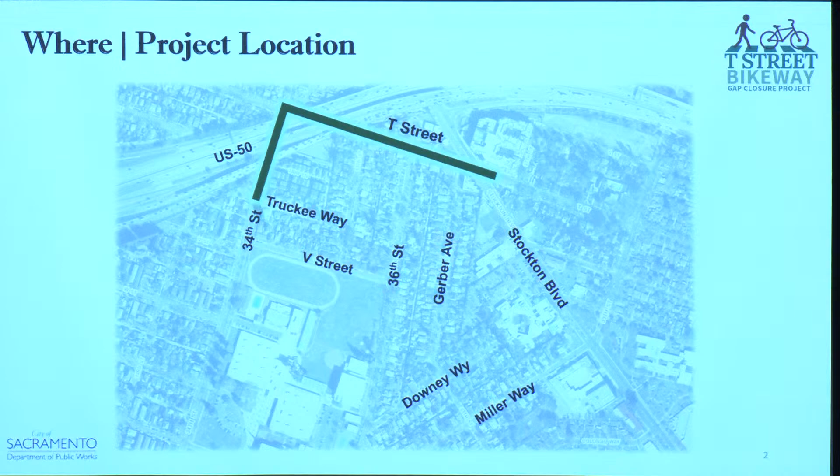If I'm talking too fast, please raise a hand. So where is this project located? This project is just north of Sac Charter High School. The limits are 34th Street from Truckee Way to T, and T Street from 34th to Stockton Boulevard.

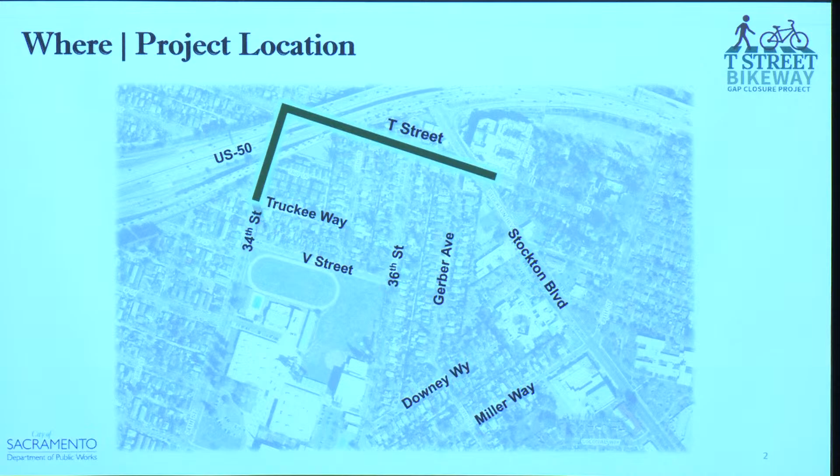Some background on this project: the city's active transportation plan, Streets for People, used public input to identify safety priorities for bikes and peds, identifying the need for continuous bike lanes on 34th and T, a ped crossing at 35th, and signal improvements at the intersection of T Street and Stockton Boulevard.

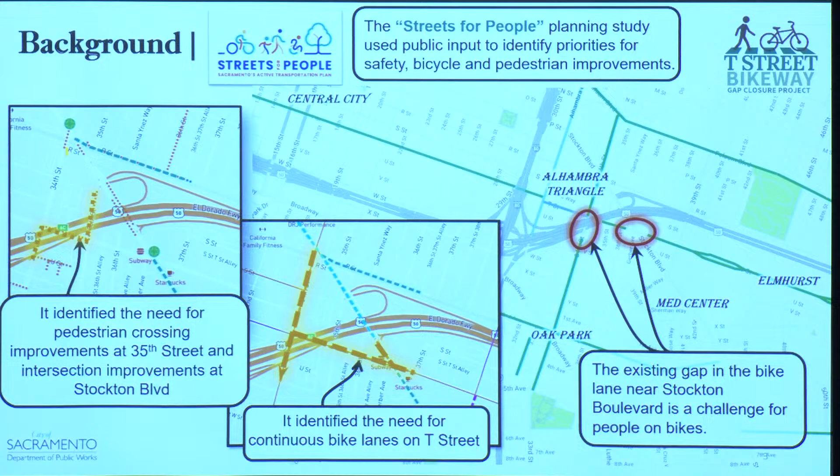Similarly, the Stockton Boulevard Corridor Plan identifies safety improvements for bikes and peds, for the benefit of the existing community and businesses along Stockton Boulevard. The intersection of T and Stockton was further recognized as an area of interest.

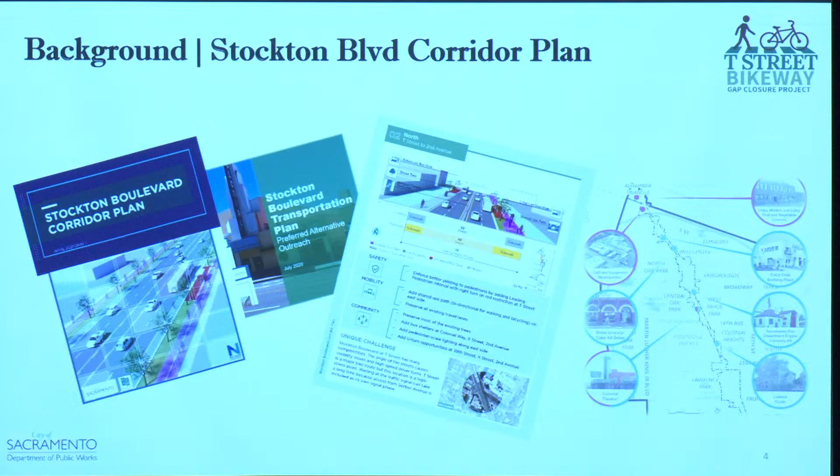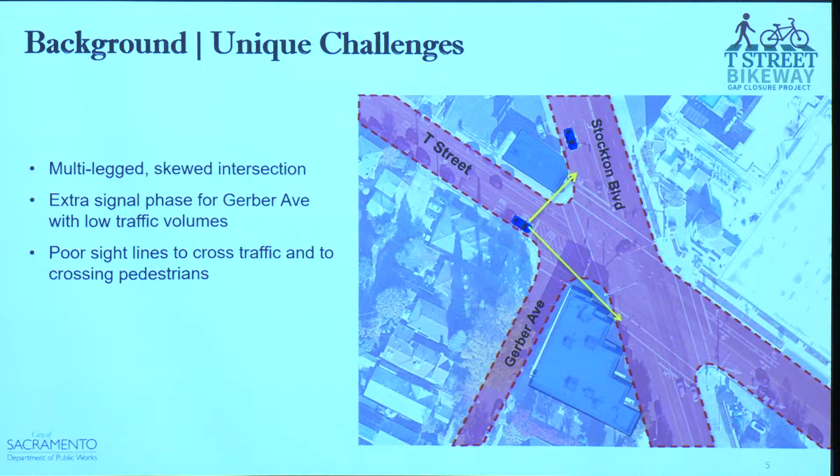Some challenges of the intersection of T and Stockton include a skewed intersection with an extra signal phase for northbound cars exiting Gerber Avenue, and poor sight visibility of cross-traffic pedestrians and bicyclists.

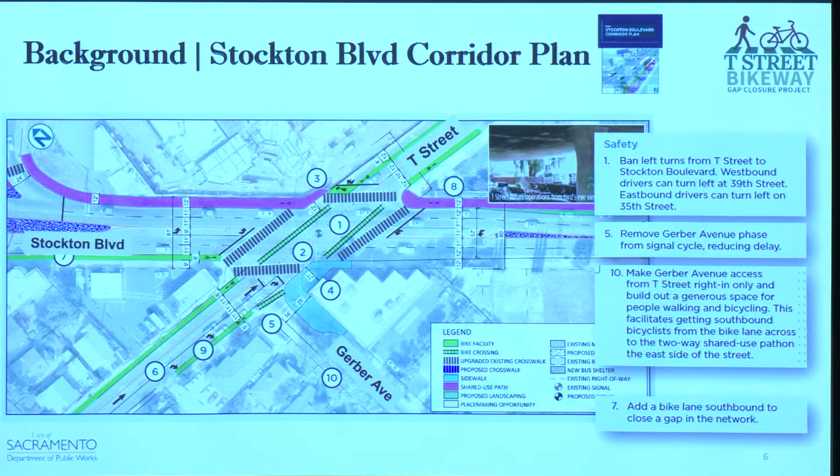At this intersection, proposed improvements from the Stockton Boulevard Corridor Plan were to ban left turns from T Street onto Stockton, encouraging westbound drivers to use 39th Street and eastbound drivers to use 35th Street. It also proposed to remove the signal phase at Gerber Ave, allowing right turns only from T onto Gerber, and add a bike lane on the southbound Stockton approach to T Street.

So why the T Street Gap Closure Project? Well, T Street has a gap in bike facilities. It's a key link between central Sacramento neighborhoods, medical services, and employment centers. It's got a lot of ped, bike, and vehicular traffic with a large rate of people commuting by foot or bike. Because of this and the complex nature of the Stockton, T Street, and Gerber intersection, T Street is a priority for safety improvements.

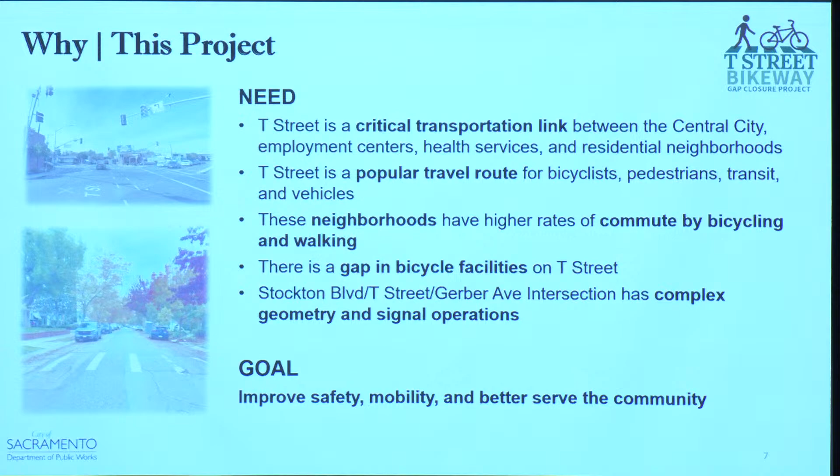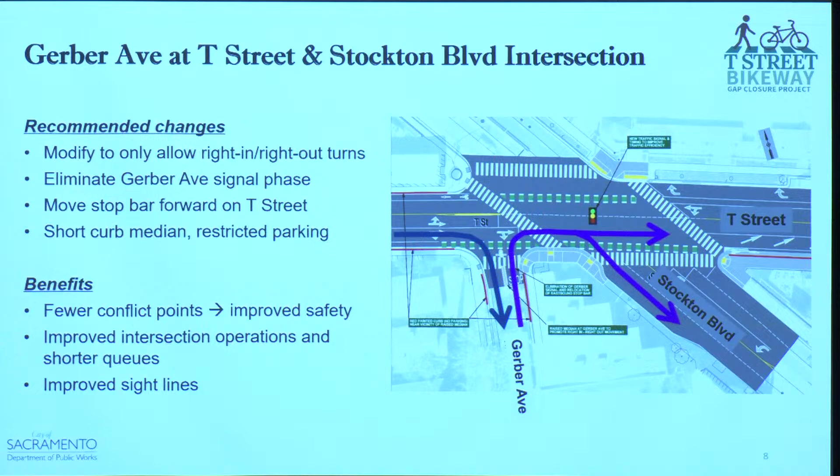To reduce conflict points, improve traffic flow, and provide safety of bikes and peds, the scope of this project includes the aforementioned right in, right out only at Gerber Ave with the elimination of the signal phase, the removal of the existing keep clear area north of Gerber, and moving that stop bar on T Street eastward toward the Stockton intersection.

Some existing conditions: cars have a long queue waiting for their turn at the Stockton and T Street intersection, which I imagine makes them a little impatient. T Street has non-continuous narrow bike lanes next to multiple vehicular lanes. East of 35th, T Street narrows to one lane in both directions. At the intersection of 35th and T, a few corners need compliant curb ramps.

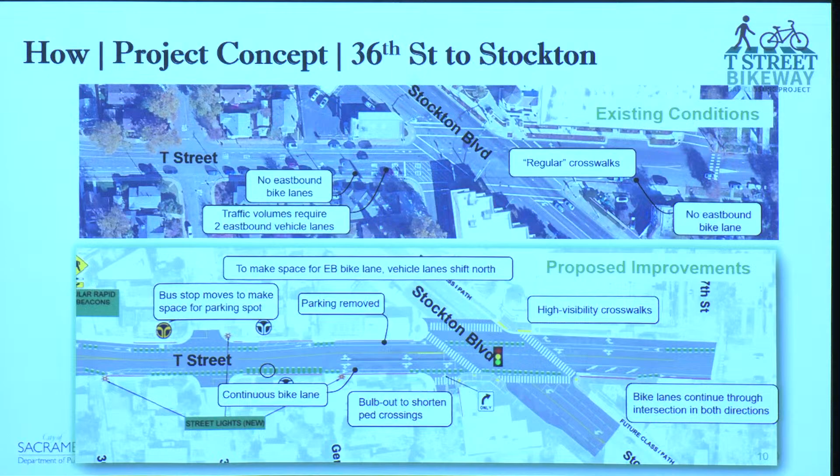Additionally, there's no eastbound bike lanes on either side of the intersection of Stockton and T. The crosswalks need upgrades, and vehicular sight visibility is not what it should be. Additional improvements include high visibility crosswalks across that entire intersection, relocation of an RT bus stop—we're currently coordinating with them on where we'll put that—and shifting the alignment of vehicular lanes to accommodate the new Class 2 bike lanes.

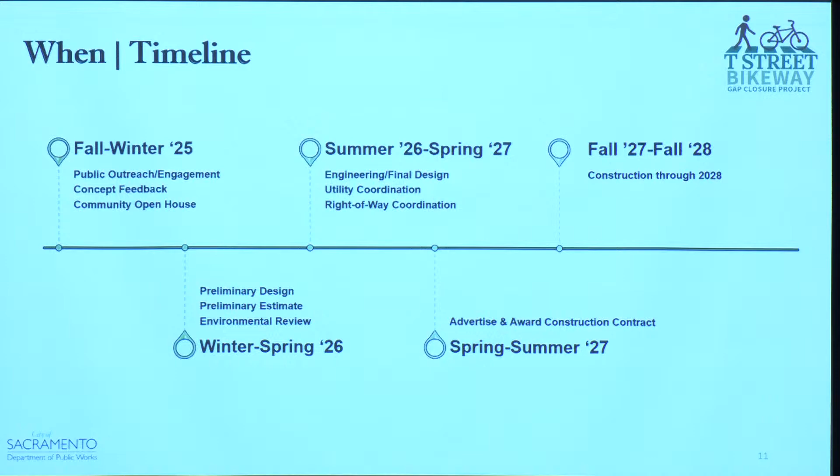Project timeline: last fall, we received feedback from our public outreach and community open house efforts. We're currently in preliminary design and developing a preliminary estimate. This summer, we hope to get to final design and complete our coordination efforts. Spring 2027 is our goal for advertisement and contract award, with construction starting in fall 2027, and construction complete, hopefully, by fall 2028.

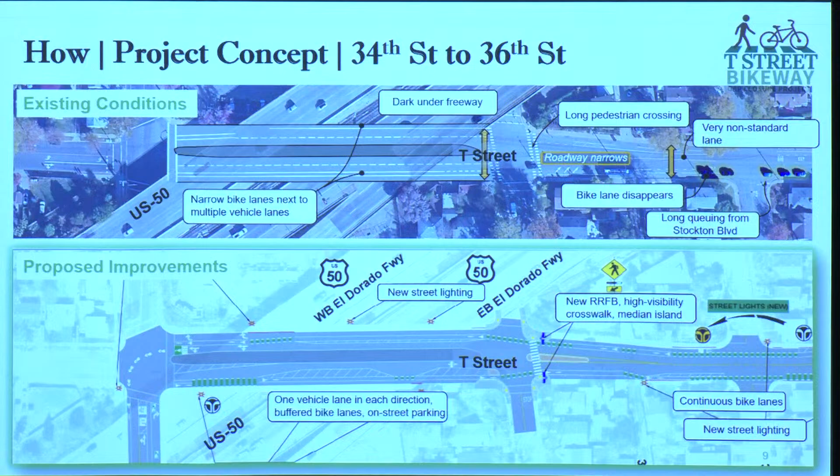Well, I would be very hesitant to continue with two lanes as opposed to one. And if you do choose two lanes, there must be higher level protection for cyclists — at minimum a Class 4, with poured concrete and bollards, because it's easy for a car to drive into a Class 2 bike lane, especially if they're coming off a freeway mentality where open car space or road space, some people take unfortunately. There are also a lot of lifted trucks nowadays, so any kind of physical protection like poured concrete goes much further to limit the people who choose to disobey traffic laws, because those are the people who tend to cause more problems.

And that continues throughout the corridor. So I really wouldn't feel confident cycling on a Class 2 lane today, especially knowing how loud it is and that there's low lighting. But if there was more physical protection all across the lane... those are the summation of my comments. I also want to say I'm friends with a public commenter who mentioned they were in a near miss while cycling here.

Thank you, and I hope he's okay, your friend.

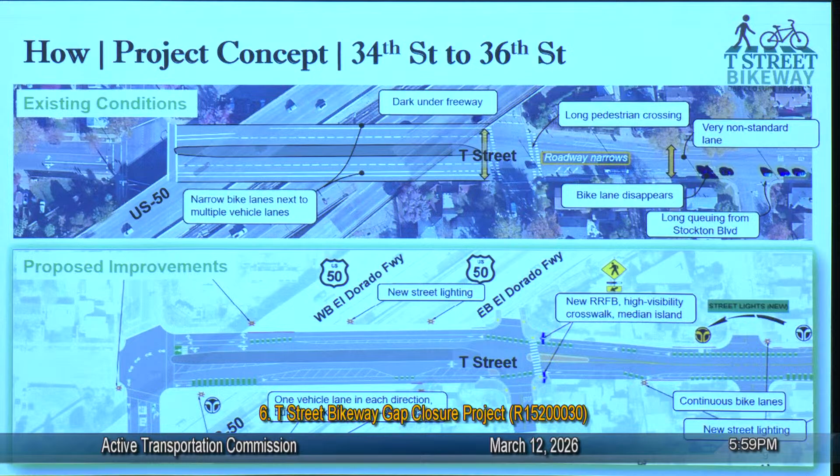All right, not seeing any other commissioners who wish to speak, I just want to thank everybody in the audience who came out to speak on this item tonight, and everyone online who provided e-comments in advance. I want to echo the comments of Dan Allison about the no right turn on red on the westbound section of T Street crossing Stockton Boulevard, on the eastbound section of T Street crossing. There already is a no right turn on red on the westbound section currently, and I've watched it pretty well — there's pretty good adoption there. People tend to respect that sign, so we'd love to see it as well.

My mic is on, sorry. Yeah, sorry. I also want to echo the comments about RRFBs. RRFBs are not a mitigation method that anyone should rely on. If anything, they give many users a false sense of security that they now have the freedom to pass without danger, but they are not respected in the city of Sacramento at all. I'm adamant about that on many different occasions. Yeah, that's all for me.

Thank you. All right, thank you very much for the presentation. Now we're going to move backwards to item 3, the Fruitridge Road Safety and Mobility Plan. I think there is a staff presentation because staff just got up and left, and I think they're going to the podium now.

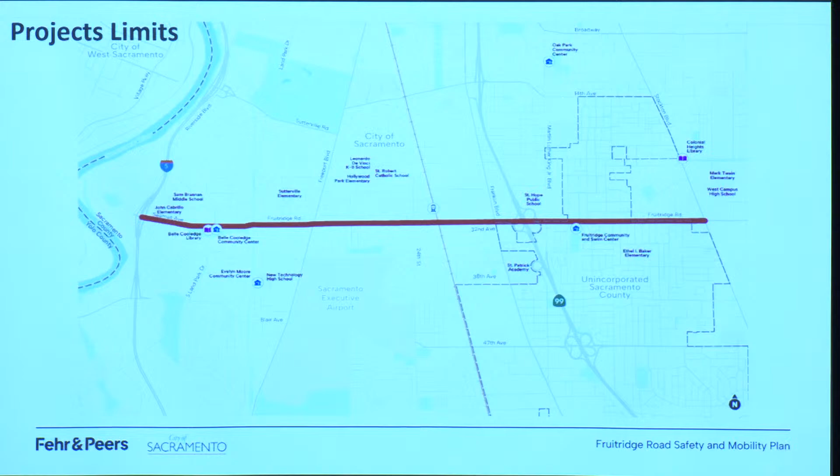And why are we doing this? Well, parts of Fruitridge, actually most of Fruitridge, lie on the city's high injury network, and it's been highly prioritized under the Transportation Priorities Plan. It's identified as a Class 4 separated bikeway opportunity in the Streets for People plan that was adopted in December, and the general plan identified this as an area that could see future roadway reallocations, or as we call them, road diets, throughout this corridor.

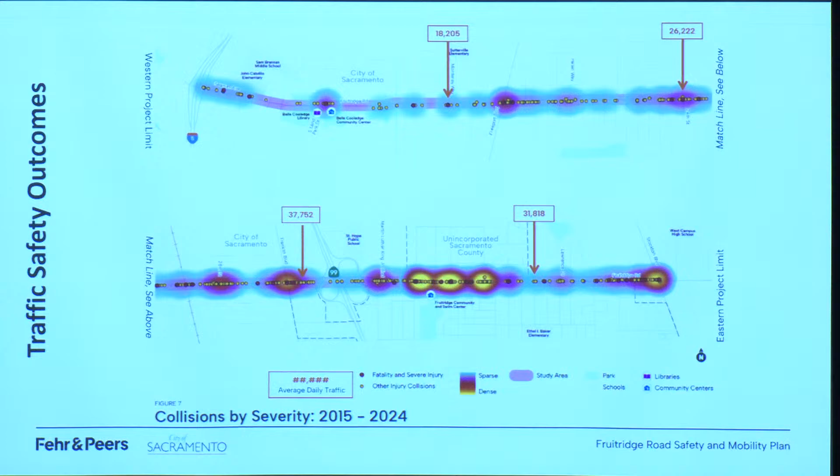So one of the primary issues on this corridor is safety. We have a lot of collision history on this corridor, whether you're in a vehicle, walking, or on bike. This graphic shows about a 10-year vehicular collision history—actually all-mode history—with a lot of serious injuries and fatalities.

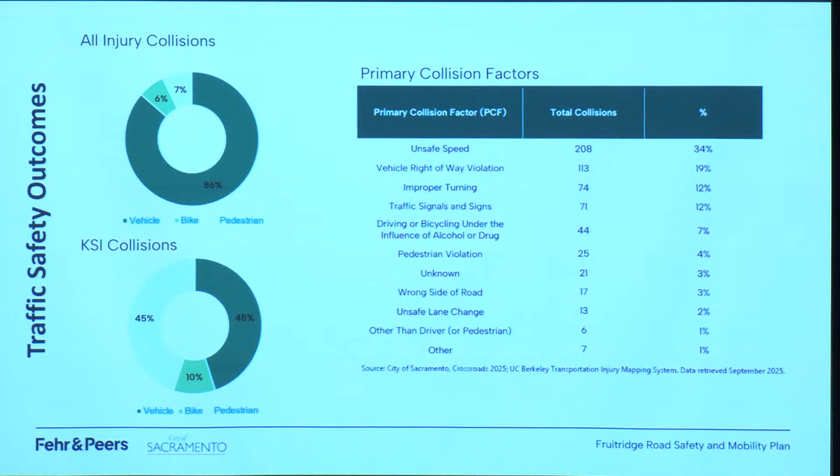This is the slide, I think, that really tells the story for why we're doing this project specifically. You'll see in the graph at the top, about 14% of all collisions involve a pedestrian or a cyclist; the rest involve both vehicles. But the KSI collisions—killed and serious injury collisions—on this corridor are predominantly people who are walking and biking. It really needs some options along this corridor to meet the needs of all people using it.

As I said, there's good opportunity for some proposed bikeways through the Streets for People's plan. Our consultant team and some of the project team did bike this entire corridor, and it's been included in several of our engagement opportunities for their presentation, and they definitely stressed that it is not a comfortable biking environment the way it currently sits.

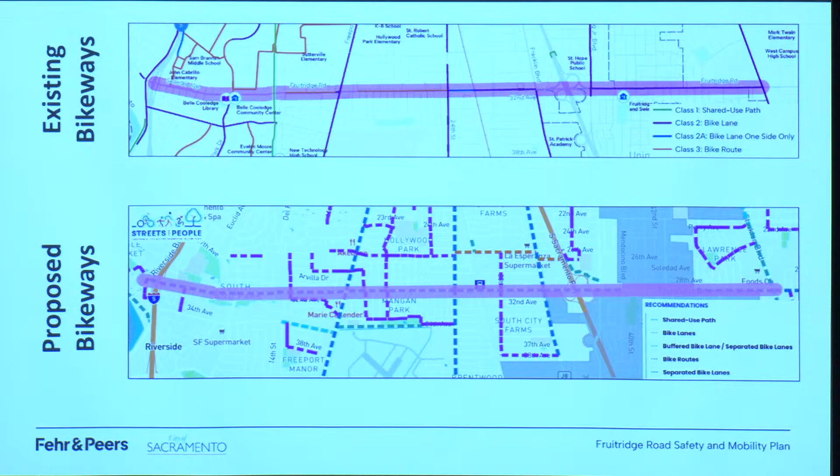So where are we now on the project? We are in phase 1, that listening and awareness portion, which will be wrapping up at the end of March. We had a community meeting last Wednesday with about 40 attendees and some good press attendance, and some great feedback from that meeting—we were really happy to hear that.

The community vision really aligns with the city's vision for this corridor. So we're going to move into the design and discuss-corridor phase of the project—that will be done towards summer, maybe early to mid-summer—and then we'll come back to you with some of the proposals and concepts we have for this corridor. From there we go into fall, where we'll be adopting a final draft plan and coming back again to check in with you to see if this meets the mark. We're looking for final adoption in spring of 2027.

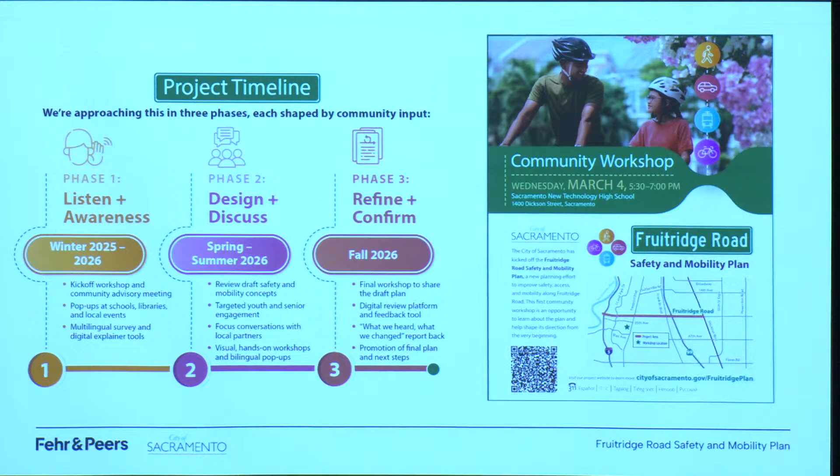This adheres to the grant guideline goals for the Caltrans planning grant that we got to fund this project. That concludes my presentation, and I'm available for any questions. I also have members of the consultant team here in the crowd as well.

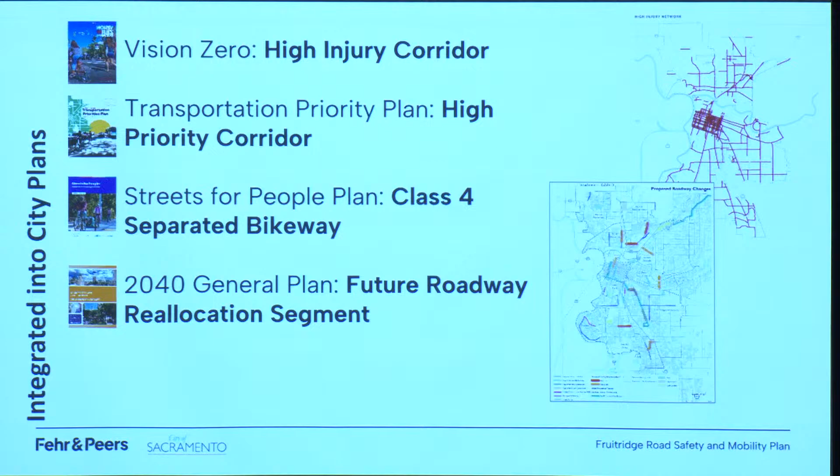Yeah, we do a lot of coordination with the county, especially on these projects that cross over into the county or abut to it. Arden Way, Auburn Boulevard project is a great example, because that project ends at Ethan and then the county is from there on. It actually butts up to the county's project that they just finished for an active transportation project there. So those projects will work well together.

For this project specifically, we have engaged the county. They've actually identified the section of the county that Fruitridge goes through, as their Board of Supervisors have adopted that as a road diet opportunity as well, or as a right-of-way reallocation. So we're working with them.

We're also working with our partners in Caltrans to identify the projects that cross over into Caltrans right-of-way. We usually have a lot of coordination to do with Caltrans because they're really concerned about backing up onto the freeway. Our concern is these high-speed slip lanes that go onto especially these older style interchanges throughout the city. So there's a lot of opportunity there, and we do a lot of coordination with Caltrans as well.

I appreciate that, and just any continued engagement. I know you guys are really doing it, I really appreciate it. It does feel like a cultural shift, at least in the built culture, to really treat these areas as locations that people live versus places people drive through. And just to reiterate, most people, when they go back and forth between the city and the county or different cities, don't recognize that. They're just going to where they go. So it needs to be fluid and work together and partnerships formed.

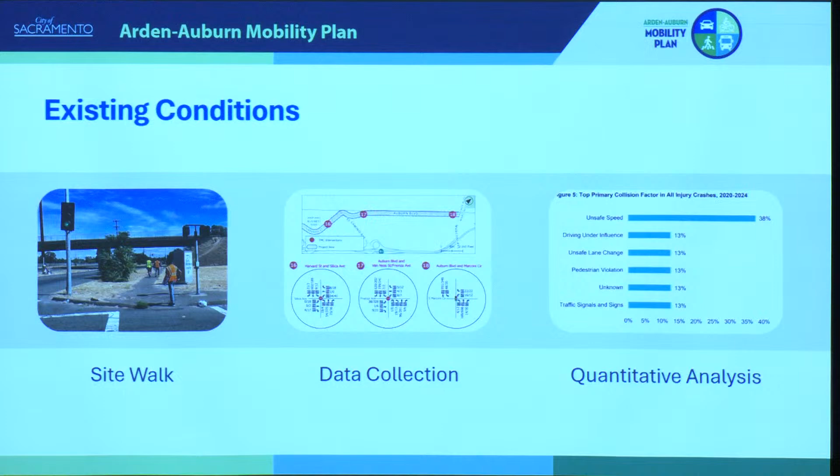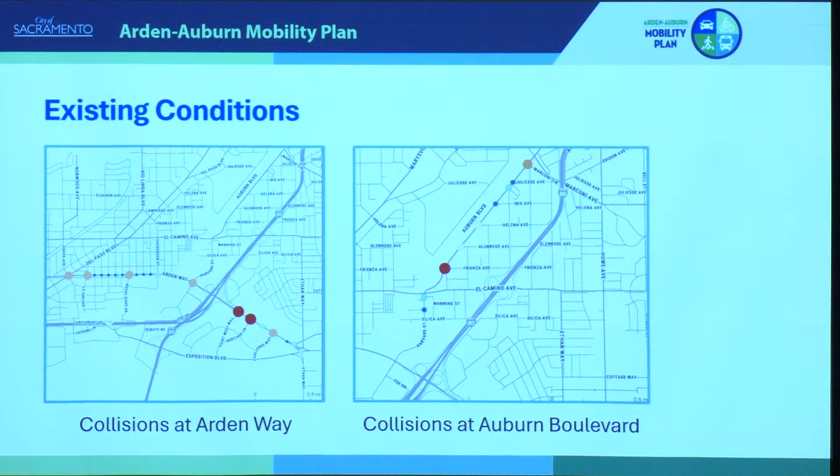Work on this project so far has been pretty parallel to the Fruitridge Road plan. We began back in July of last year. The project team went out, walked the area, and recently finished our existing conditions analysis, including data collection and analysis on traffic speeds and volumes, level of traffic stress for people walking and biking, and collision history on both Arden Way and Auburn Boulevard. We also looked at transit ridership, light rail and bus stops, boardings and alightings, census data on population and job density, and level of service for the stop-controlled intersections here.

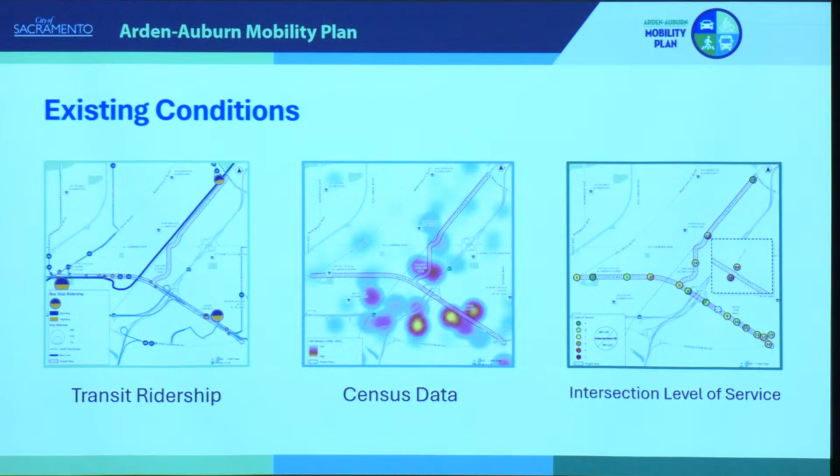So ultimately, all of this data is really helping us get a picture of how people are traveling in the area, where they're going, and where they might experience some challenges or pain points. But as we all know, data doesn't tell us the whole story. They're just numbers, points on a map.

So we recently kicked off our first phase of community engagement for this effort. We held our first community workshop yesterday evening. We had about a dozen community members come out, so not a huge turnout, but the folks who came spent almost the entire workshop time with us, giving very detailed and personal experiences of what it's like to use all modes in the corridor area.

And it's not our only touch point with the community. We have an online survey open now through the end of March, and we'll also be going out to the community for two pop-up workshops in a couple weeks. The first will be March 21st at Arden Fair Mall, and the second on March 24th, when our team will be at the Arden Del Paso Light Rail Station.

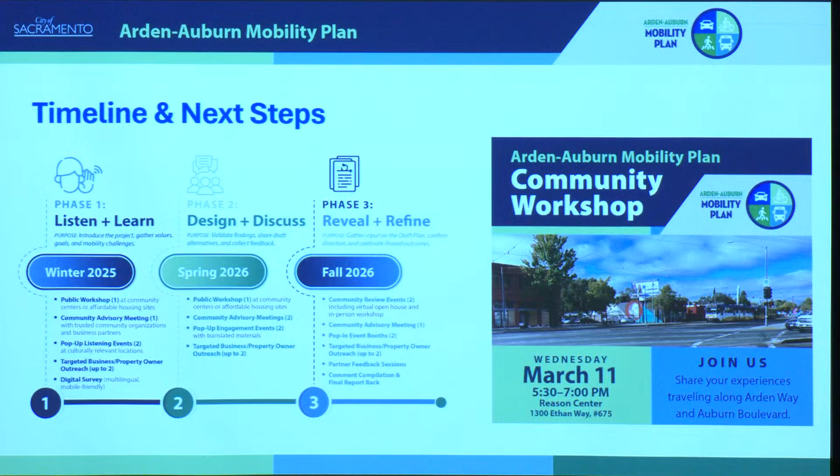So we're going to take all the feedback from the rest of this month and come back to you around the May-June timeframe with initial early draft ideas for improvements for all of you to respond to. We'll take that feedback and come back in the fall later this year to provide the draft plan for your input.

So if you haven't already, scan that QR code and sign up for updates on this project. We'd also really appreciate the Commission's help with ideas on other community-based organizations and neighborhood groups. If you've got personal friends or family in the area, please share information with them. We're happy to take suggestions for other partners to involve, and your ideas for those draft goals and objectives.

So that's all I've got for today. Happy to take questions.

Is there any speaker slips on this item? Thank you, Chair, I have one speaker on this item, Dan Allison. Oh, my apologies, that is for the next item. Chair, we have no speakers. Are you sure, Dan? All right, that's weird. All right, are there any commissioners who wish to speak on this item?

Excuse me, Commissioner Harris. I want to say I'm a little disappointed that Dan Allison isn't speaking about this project. I'm taking it a little personally as a District 2 member. I'm looking at you, Dan, and others that regularly come - this is an invitation to take your technical expertise and give us your best ideas. I went to the meeting last night, I know it's a shock, and I just want you to know I'm like half the comments on there. It was a great workshop, but I'm probably the most vocal, opinionated person who showed up.

But it was really well done, and I just want to compliment the staff working on this, the consultants - it was great. If you can't make one of those pop-ups, please engage. This area is, like I said, also one of those challenging boundaries. A lot of people don't think of the Arden Mall as part of the city even, and it's a really conflicted or diverse area of uses, so a road diet just isn't going to solve all the problems. It has a lot of complicated crossings. It's also an area that's really overlooked.

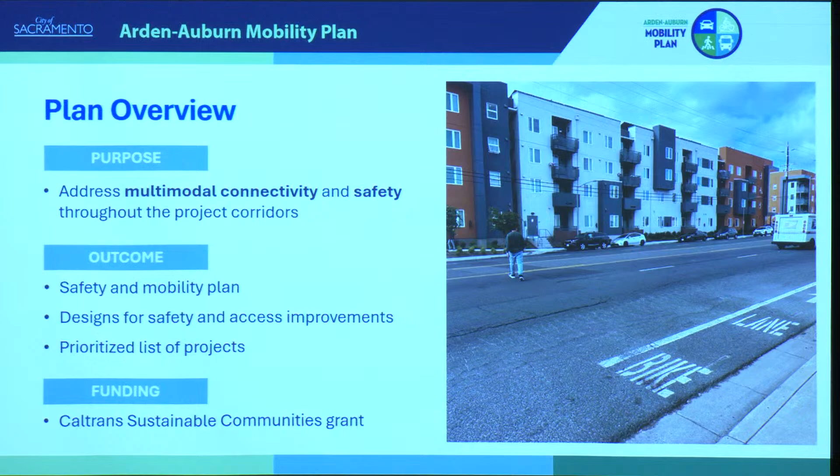I just want to thank you again for your efforts, but to be specific about sidewalks, and recognizing there's a lot of infill development with all the light rail there, our city is in a housing shortage, so hopefully we can build more housing in those areas. But if it's uncomfortable, to put it nicely, to walk somewhere else, then maybe we shouldn't be encouraging that much. So thank you.

I'll add that we've been meeting one-on-one with a couple of the different property management companies. For the Eames, the Palms, and I believe tomorrow we're meeting with the Salvatore apartment manager, so we should be able to reach those tenants and also have them be part of the process.

Commissioner Risho Patel.

Thank you, Chair. I'm curious to know what community organizations and what businesses you've been in partnership with, and to what extent this has been for outreach versus for the development of the design.

Do you want me to list them off? I have them here. Okay, so earlier at the end of February, we held 2 focus group meetings, one focused on business interests and another on more of our community-based organizations and advocacy groups. For business interests, we had several of the different chambers of commerce, about 3 or 4 out there: the Howe Arden Shopping Center, North Sacramento Chamber, Greater Arden Chamber of Commerce. We also had Sutter Urgent Care come out since they have a facility there, and Arden Fair Mall came out to that, along with a couple others that were invited but didn't attend. We're still trying to get a contact for Cal Expo, so if anybody has a friend who knows them, please leverage that.

For our community advisory group, we had representatives from SABA, AARP, Mutual Assistance Network, the Greater Sacramento Urban League, the Rancho del Paso Neighborhood Association, and Vida de Oro, along with several schools and other community groups and neighborhoods in the area that were also invited. I'm happy to send out the full list.

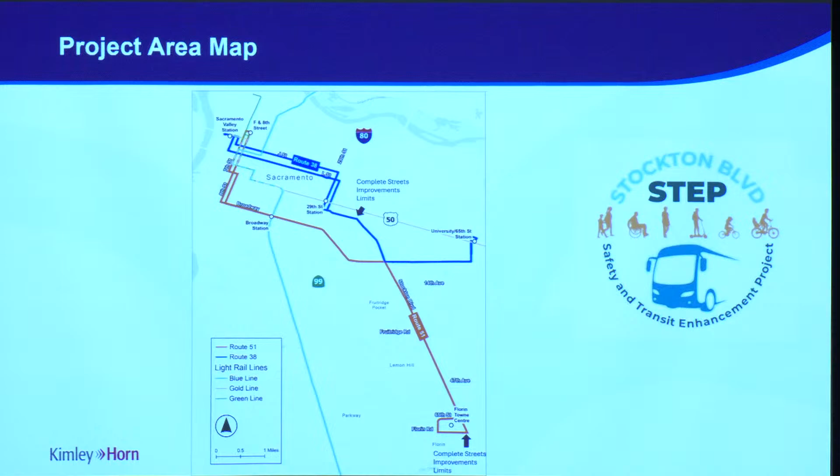This slide shows a project area map, and the project includes two primary components. One is a bus rapid transit component that will extend on the south end from the Florin Town Center north to the Sac Valley Station. Layered in there is also a complete streets improvements project, with limits on the south end from Stockton and Florin up to the Stockton-Alhambra intersection.

Similar to some of the other presentations today, we've also developed a vision for this corridor, and some of the primary components include enhancing safety, advancing a complete street project to transform this corridor from one geared towards vehicular movement into a multimodal corridor. We want to advance bus rapid transit to provide premium transit service, building upon a strong core of ridership—the existing Route 51 along Stockton Boulevard is the highest ridership route in the SAC-RT bus system. We're also looking at sustainability, adapting to a changing climate, particularly for active transportation users and transit riders, making sure there are better amenities for folks waiting for the bus.

And really providing a project that will foster access and opportunities for the community along the corridor. We've used those purposes to drill down with objectives: improving safety and reducing fatal and serious injury crashes, providing safe corridors for walking, cycling, and accessing transit, building upon that strong base of existing transit ridership to increase ridership and the modal split for transit, supporting economic development and access to jobs and education opportunities. Our final purpose is to develop a fiscally responsible project so we don't do a study that ends up on a bookshelf—something that can be fundable and built within a reasonable timeframe.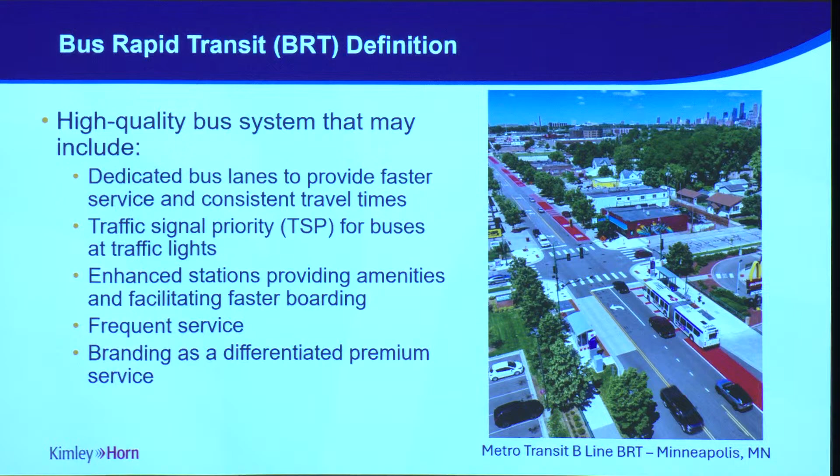For the project right now, we're looking at two alternative alignments between the Florin Town Center and the Sac Valley Station. Alternative one follows the existing alignment of Route 51, proceeding along Stockton Boulevard north to Broadway, traveling west on Broadway, then coming into downtown along 8th and 9th Streets. Our second alternative, the Route 51/38 hybrid, would run along Stockton north to Broadway similar to Route 51, but then take the Route 38 alignment into downtown to access Sac Valley Station - continuing along Stockton north to T Street, then along 29th and 30th Streets, and continuing to Sac Valley Station along J and L Streets.

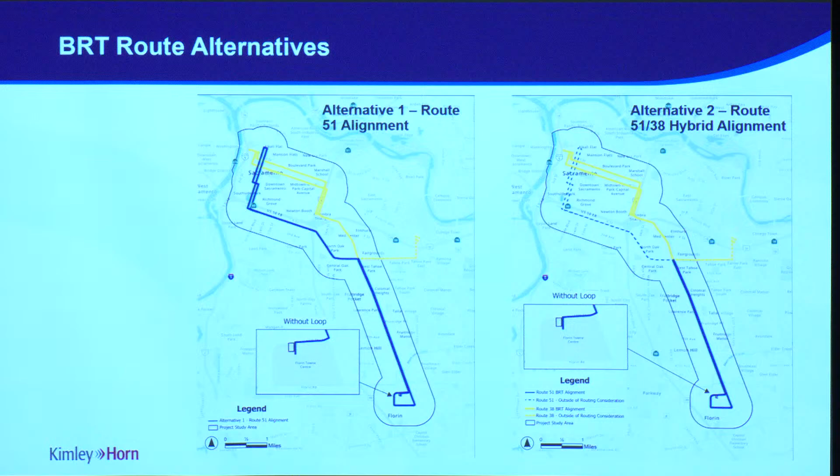Looking at these two alternatives, some advantages of alternative one are strong ridership along the Broadway component that would benefit from bus rapid transit. Some advantages of the Route 51/38 hybrid alternative are that it serves the medical district and Aggie Square, where there's a lot of future growth already occurring, providing access for communities to the south.

Pivoting now to complete streets - our definition for the public is it's a road designed to be safe for all users. The goal is for the street to be accessible for everyone, no matter which mode they're using or the level of their abilities. We say 'may include' for the complete streets definition because we'll get into some trade-offs, but things being looked at include dedicated bike facilities, wider sidewalks, improved pedestrian crossings, and dedicated bus lanes.

On the right side of this slide, we have a travel mode hierarchy developed for the project. We start with the most vulnerable users at the top - those walking and rolling - and work our way down to cyclists and users of micromobility and electric devices, then public transit, with vehicle traffic lowest on the hierarchy.

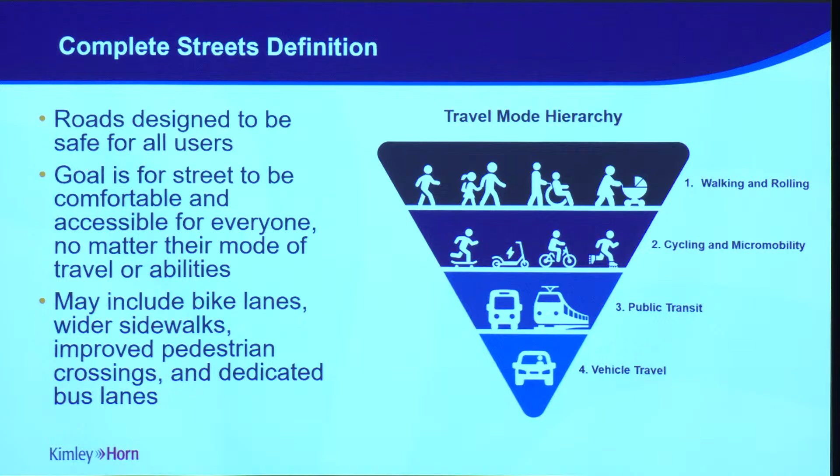Now I'm going to walk through a sample corridor segment. We've divided the corridor into several segments, generally based upon the width and cross sections of the corridor and the amount of space we have to work with in terms of developing improvements.

This section between Elder Creek and 20th Avenue - this slide shows the existing conditions. The picture on the left shows generally 5-foot sidewalks with not much separation from travel lanes where vehicles move at fast speeds, often with utility poles and other obstructions within those narrow sidewalks. The pictures on the right show behind the back of sidewalks. If we look to widen, there are quite a few considerations - trees within there that have value within the community, as well as utilities that will be expensive to relocate.

Also in the bottom picture, what we see is that there are quite a few driveways with the commercial uses along the corridor, which really makes it challenging for pedestrians and cyclists along the corridor.

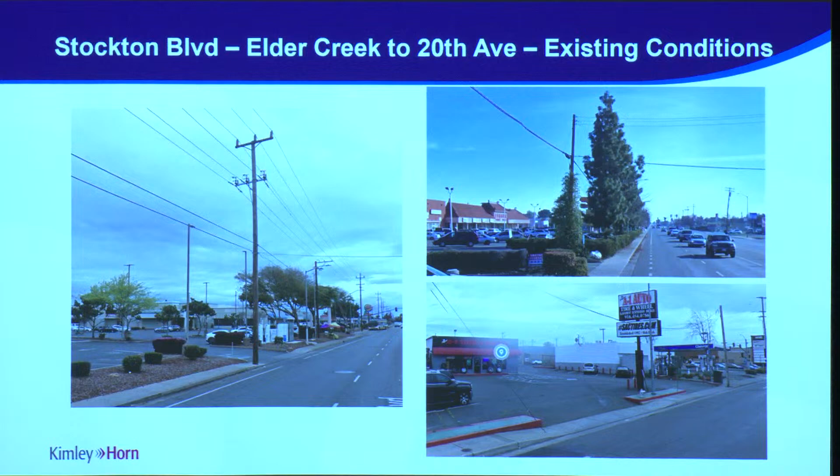So I'm going to walk through three preliminary options that have been developed for this section of the corridor, and they range from the quick build, what can we do quickly at a lower cost, to more intensive improvements that are higher cost.

This first set of improvements really looks to keep the improvements within the existing curb-to-curb width of the street, which is about 64 feet wide. So what we show on this slide is introducing dedicated bus lanes.

Adjacent to the dedicated bus lanes, we do have bike lanes that do not have a buffer, but the bus lanes do help provide a buffer from the vehicle traffic.

Some of the advantages of this: it is cost effective, could be built relatively quickly, less disruptive. There's not going to be many impacts to the utilities along the corridor or to private property, which in a lot of locations has actually expanded their parking lots into the public right-of-way.

And with this, we do see that there could be some opportunities to explore sidewalk widening at locations where there are utility poles or something that's presenting an obstruction for the pedestrians.

Some of the trade-offs or negatives associated with this: we have narrow Class 2 bike lanes. There's not a buffer, although the bus lanes do help provide a little bit of a buffer. In general, there's nominal improvements with this alternative for cyclists and pedestrians.

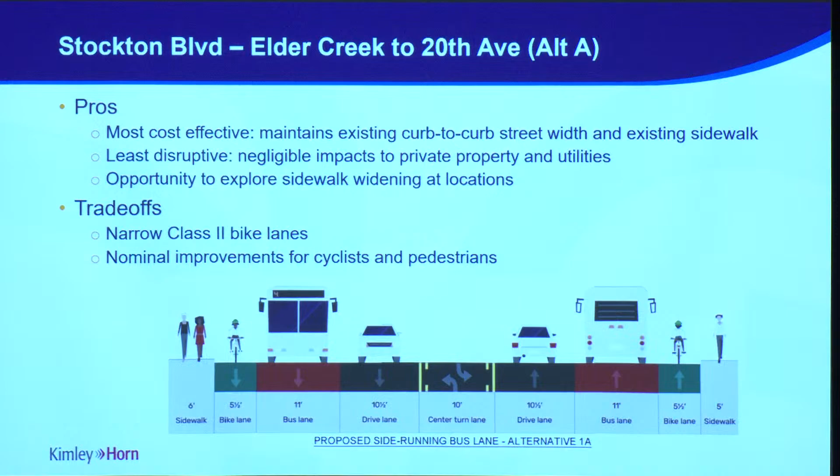So now I'll go to the next alternative, Alternative B. This alternative begins to look at extending the improvements beyond the existing curb-to-curb width. With this option, we actually maintain that existing curb on one side of the street, but on the other side of the street, we introduce a shared use path.

Some of the advantages of this alternative is that it widens the existing sidewalk on one side of the road, so you've got a better facility. Also, the improvements within this alternative do not extend beyond the back of sidewalk, where we see that there's a lot of challenges that would be associated and added cost to the project.

In terms of some of the negatives or trade-offs, there is a higher cost with this. It requires sidewalk, curb ramp and driveway reconstruction on one side of the road, impacts to drainage also. Some utility relocations would also be required just to maintain adequate clearances along the corridor.

And in general, it's a constrained, narrow width of a shared use path on one side of the road. It's a little bit less, it's not as wide as desirable.

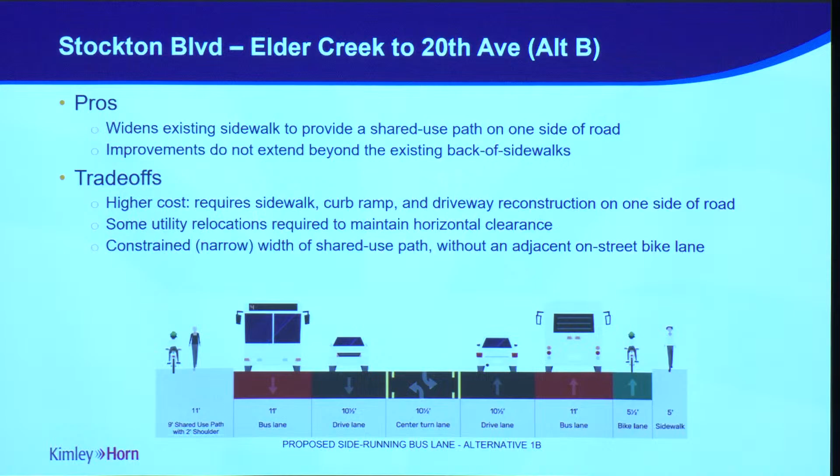Our final alternative that's under consideration is a more intensive alternative that really reimagines the Stockton Boulevard corridor. It uses all of the right-of-way, even beyond the existing back of sidewalk, to be able to provide separated buffered facilities for cyclists, and then also a separate facility for pedestrians.

And so those are the benefits. The trade-offs are the higher cost. The roadway widening requires sidewalk, curb ramp, and driveway reconstruction, as well as redoing the drainage system along the roadway.

And there's a lot of conflicts that need to be addressed behind the existing back of sidewalk, including impacts to the overhead utility poles, the street trees, and property improvements that have encroached into the street right-of-way, which often include parking or sometimes the on-site drainage.

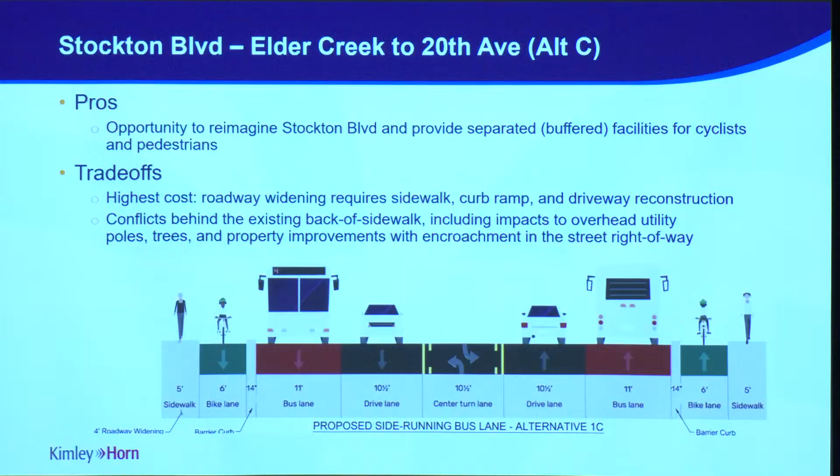So in terms of our project status, as I mentioned, we're in the alternatives analysis phase right now that we anticipate completing by this summer.

What we would like to do by this summer is select the preferred route for the BRT service and to define which complete streets improvements would be advanced into the subsequent environmental review and preliminary design phase that would start the second half of this year.

As we continue to work through the project, one of the other tasks will be to identify funding sources so that the project can be advanced, hopefully seamlessly, into final design and construction.

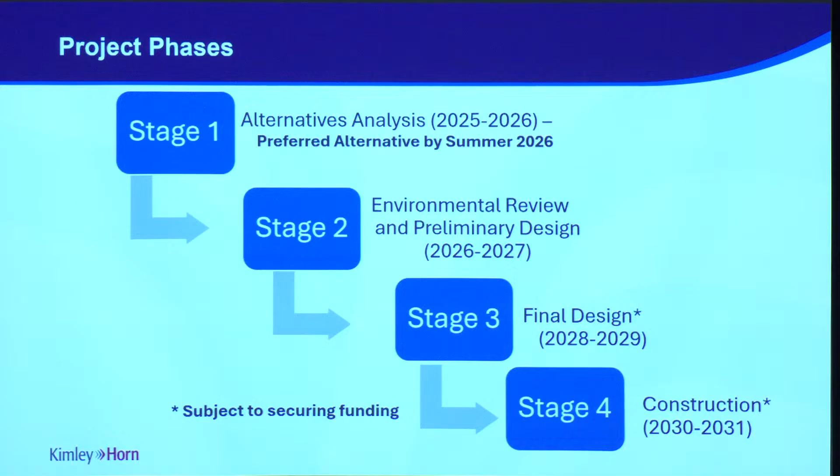And that wraps up the presentation, and I'm anxious to receive some feedback and happy to answer questions.